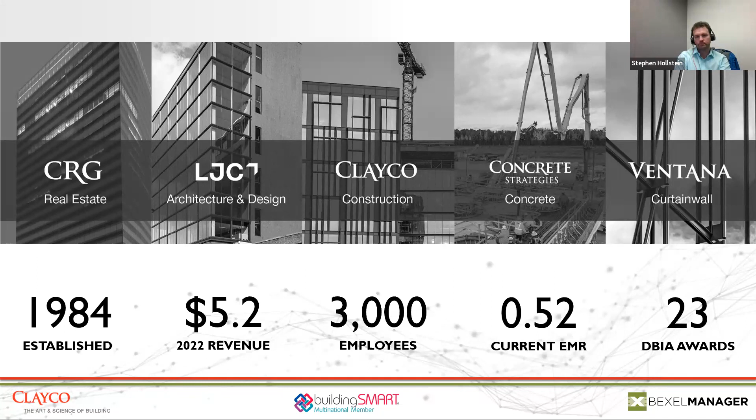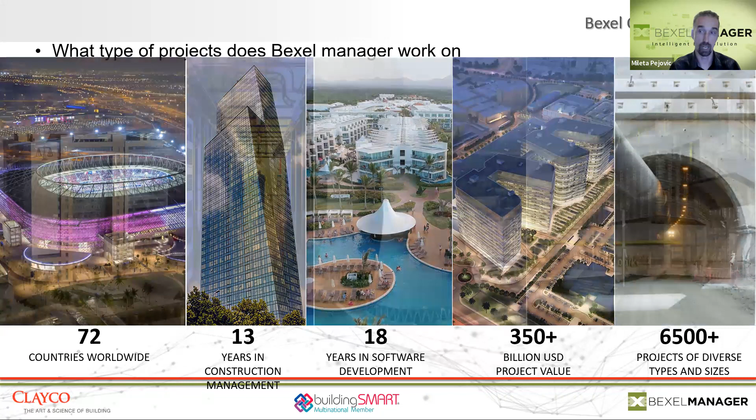So Bexel Consulting is a software development and consulting company. We are specialized for BIM in construction, and with nearly 2 decades of experience, we have become pioneers in BIM implementation, collaboration, management, and software development. Over the years, we have undertaken a diverse array of projects, varying in type and size, as you may see, and as demonstrated on this slide, our portfolio showcases our expertise and projects we have successfully delivered. In the past 9 months alone, we almost doubled the number of our clients compared to the previous year, and this reflects our dedication to driving success. Our client base includes designers, project managers, contractors, and large-scale project owners who trust our expertise and rely on our consulting services. They are using not just our services, but also our innovative BIM platform, Bexel Manager, to improve their efficiency.

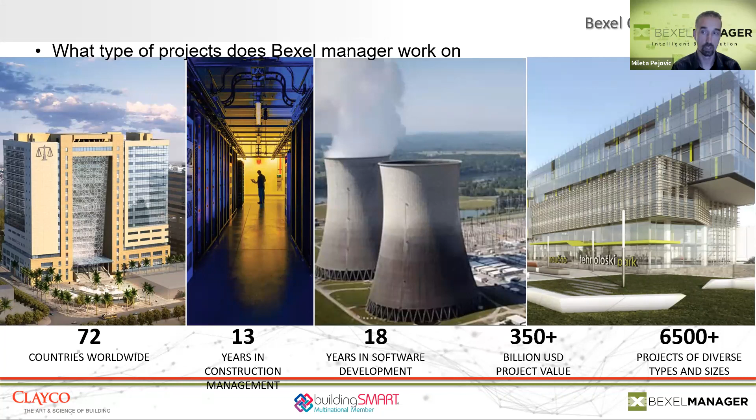So what we'll learn with this presentation, right? So our vision, there's a great motto our founder really believes in, and that's building beyond these walls. We're not delivering just a product to the customer or trying to get in budget or schedule, but really giving them the best product that their money can buy, and really handing over a product that we would want to be living in or being the facilitator of.

And when that comes, right, as Mileta mentioned as well, pioneers, right? We really are bringing in digital platforms, other technologies to really bring in and facilitate greater efficiency here. And that strategy alignment with the business model, everything from an RFP to project execution and turnover, we're really bringing that integrated delivery model. And that means data, right? 3D modeling is getting into then how do we bring in data and really enhance that and align with the data and enrich that data for our use, for managing it, for communicating it, and coordination. So the role of data in the project lifecycle, you'll learn that within the 4D and 5D environment Bexel Manager is offering here and bringing that in with Clayco.

And the partnerships, right? We don't treat Bexel as a consulting agency, they're a partner with us. And all of our projects together, we really align and really feed off one another, the benefits of one another. And from there, that is in that technology roadmap, the beta phases and bringing in new versions. They're really leaning on Clayco and other clients to offer how do we best bring better versions and enhance our abilities with various clients. And the collaboration step, I've really focused here that at Clayco with my schedule integration team, we have to collaborate. We would need to be front and center within our field teams, and we really go to the finish line together and bring that structure, proper workflows, and adopting that. And along the way, right, we are still challenged. We are every day facing challenges within their various work sectors, different projects and milestone completion dates, and we were looking at bringing success there.

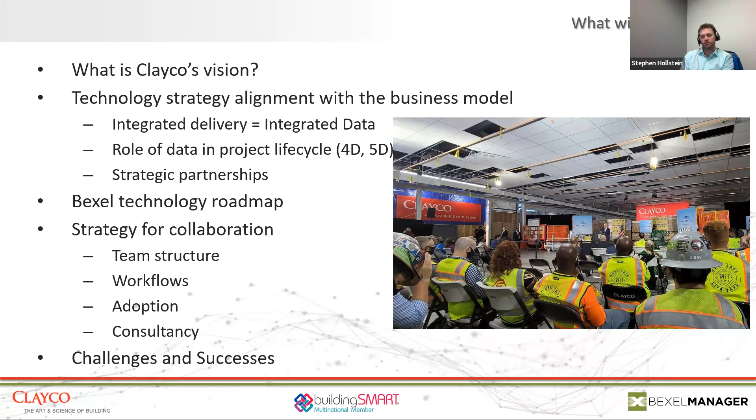Okay, so the compass is north, right? We're really looking at a strategy of always appearing and going north here, and that's in our perspective, utilizing the data that's in the 3D model environment when it comes to property information, classification of elements, and various roles within that classification of the structure within the model, and integrating that with schedules, estimates, and bringing that schedule management and cost management effectively.

And we're able to do that from the inception of a job through the build out phase of it. That really gives us perspective, going over and succeeding from previous inefficiencies we've encountered, and so much documentation and not utilizing fundamental information, working with estimators where everything is still in 2D drawing information, and being able to use the Bexel platform and provide a quantity takeoff in just 5 to 10 minutes, doing an MEP QTO I just performed.

And Mileta will share as well about going beyond pretty BIM.

From a business perspective, we have experience from both sides, from designers and from client sides. Currently we are focusing on assisting our clients in optimizing projects and project implementation and improving collaboration. It's very important to use and improve available data throughout all project stages, since the basis of BIM is 3D and the core of VDC is information. So it's crucial to use information even from the pre-construction phase to identify and mitigate risks, then during planning implement location-based planning if possible, and optimize construction processes. Finally, use collected data during the construction process for more accurate facility maintenance.

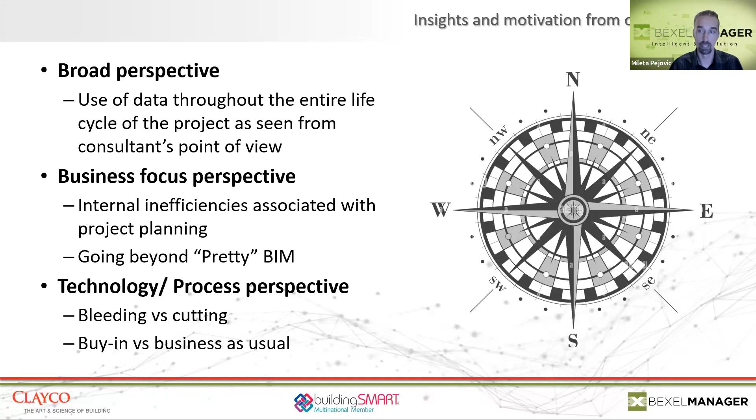Everyone plays a critical role in the success of a job. I'm a big believer that in construction projects, you win and fail as a team. We really want to bring that adoption, and get those stakeholders to really buy into the concept of wanting to succeed. We want to bring value, quality in our work, and enhancement. That's where Bexel comes in, with visualization and bringing that integration together.

My background is a lot in the project control side. I have a lot of experience working in project scheduling, earned value, cost management. This really is one of the greatest platforms I've encountered yet in my 15-year career that really hits the mark with those metrics you really need from a successful project delivery of earned value, and looking at your performance indices with schedule and cost.

And that's where the measurement comes in, right? Going through your mistakes, historical data, and really focusing on what was successful, what was not successful in past projects, the amount of effort that goes into it, and being more streamlined there. And aligning, that really goes back into the integration part of it, process and technology, the organization being vertically integrated together with all phases and all levels of the company.

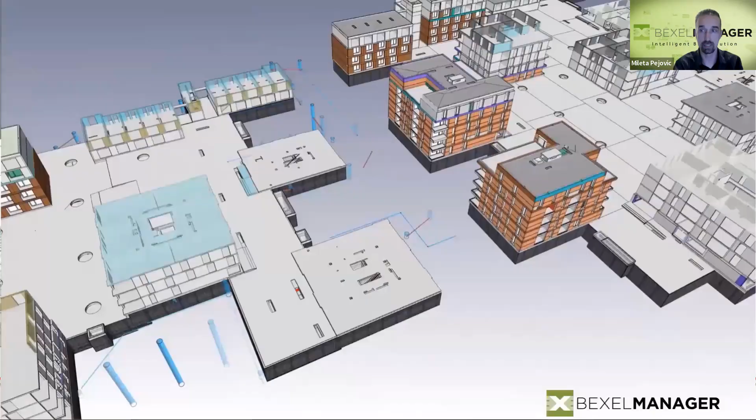This video showcases the workflows and functionalities of the Bexel Manager platform and illustrates how these features seamlessly integrate within a cloud-based reporting environment, as you may see across a range of use cases. What truly stands out is the simplicity of conducting all these BIM analyses and the freedom to exchange and share results. This significantly enhances workflows and increases efficiency and collaboration between different stakeholders.

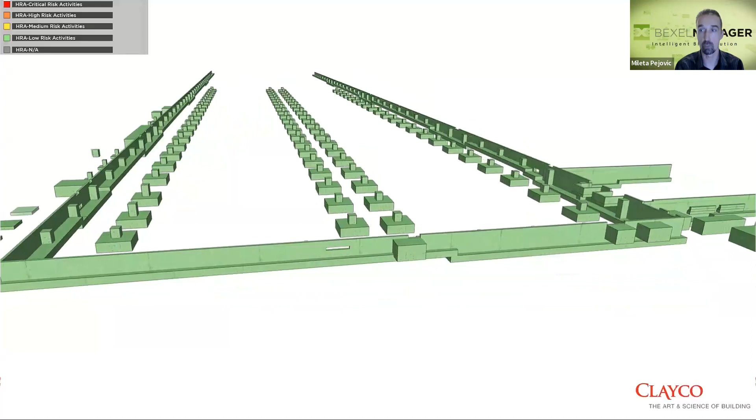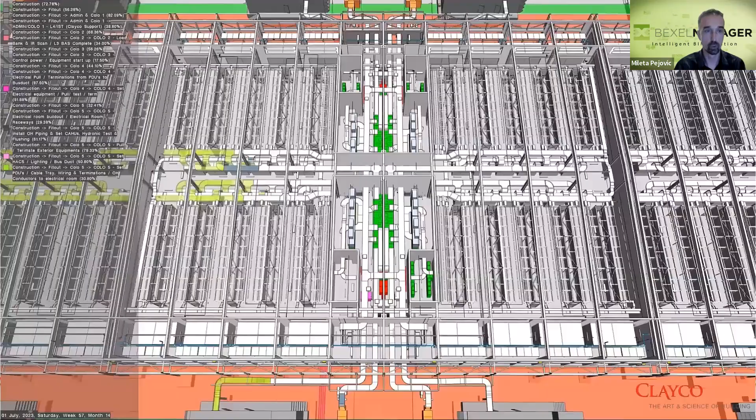These presented projects and the dashboards that I will show you in a second are typically customized to meet specific clients' requirements for real projects. These are all real projects, with challenges that came as outcomes of real challenges and real results, which are suited for our clients and finally for the investors as well.

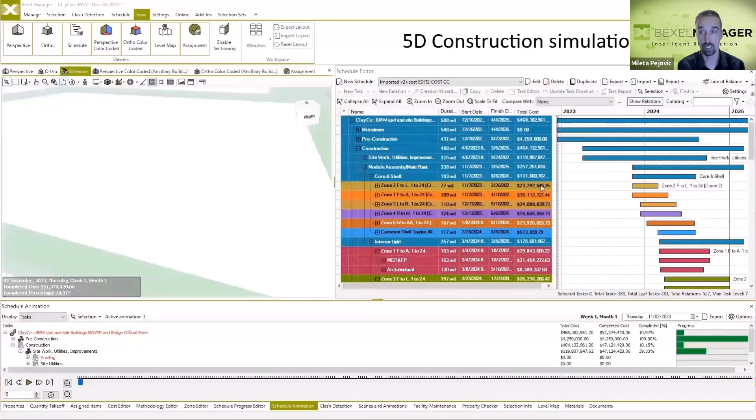I will just highlight some of the key performances, such as different types of outcomes, results, and reports that can be generated almost automatically with our tool, using different types of results.

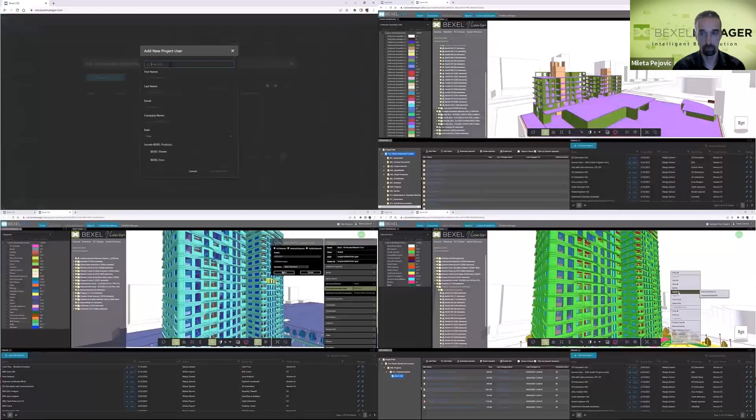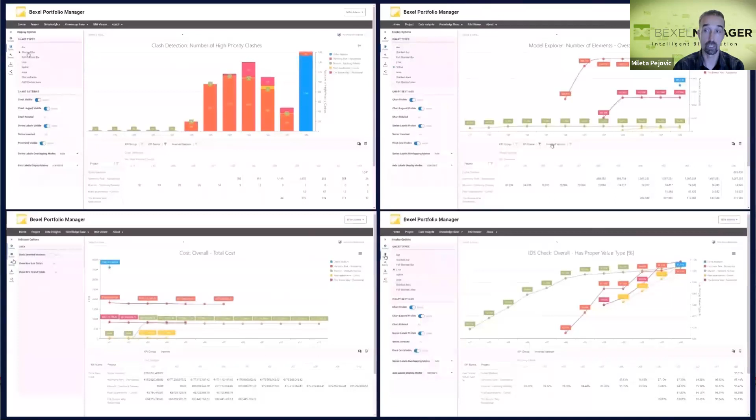Another vital aspect of project key indicators is, for example, earned value analysis, which is really important to clients and general contractors, who usually want to know this. All these results can be generated for any project at any project stage, coming from the integration of the data and geometry, and can be automatically exported directly from the platform using an automated approach.

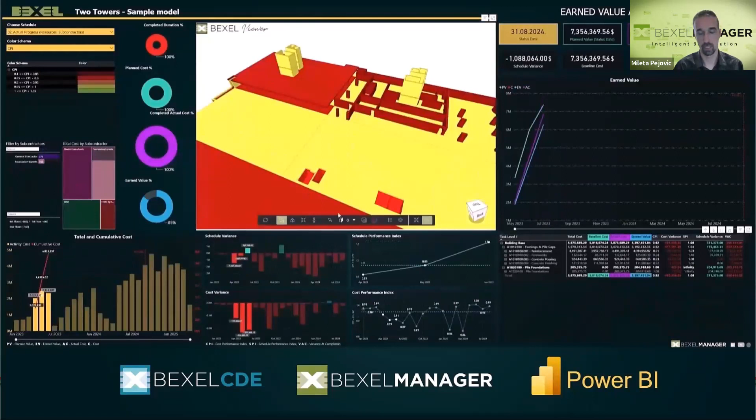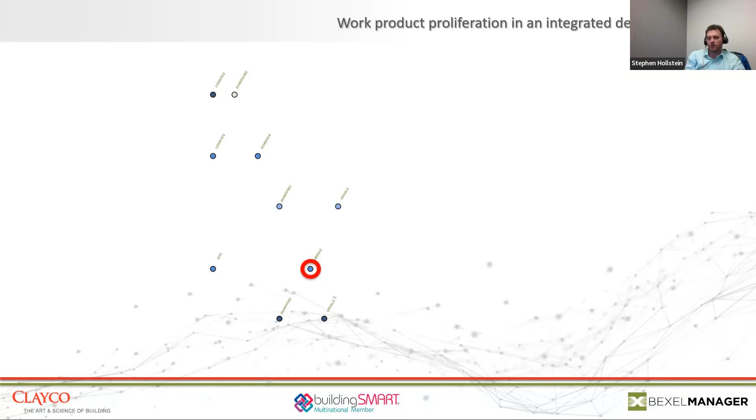One thing I'd like to add to what Mileta just shared: I think many in the group may have a perception that 4D and some of these visualizations are just a pretty picture. But what I really stress to clients, and even our construction field teams, is that we're really harnessing what the BIM model is providing us and validating our planned schedule, utilizing quantities and properties in the model.

We show how long a schedule may take, how the budget may show a cash flow, and how much money we plan to spend on a monthly basis over the duration of the project. So there's a lot more than just a picture in what we're presenting in our proposals or even in field coordination. Even on the field coordination side, there's a lot of logistics and strategy planning that goes in, from staging and material to installing in proper work zones, having a true line of balance, and leveling resources to effectively manage productivity.

So there's quite a bit there, and the pretty picture is really just missing the mark in what we're gathering. So here's a bit of a project life cycle just to display for you all within the integrated delivery cycle.

Like I showed here, I'm really hitting on schedule very early on in the early design phase, pre-con, and in through construction. And as we go into the phases of our execution, we expand. We're gathering more information. There's more maturity with model and data information, and we're really embracing that. We're harnessing that information. And what is that doing?

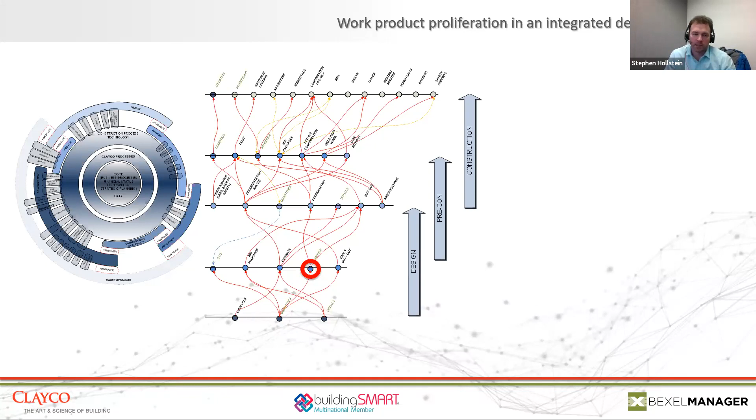Yes, so the essence of BIM is about capturing construction knowledge and leveraging it at every phase of a project, progressively adding additional layers of information and preserving it for all upcoming stages and further stakeholders that can benefit from the previously collected data. In other words, BIM serves as some kind of dynamic repository of construction insights that not only grows as the project advances, but also endures as a valuable resource for the future.

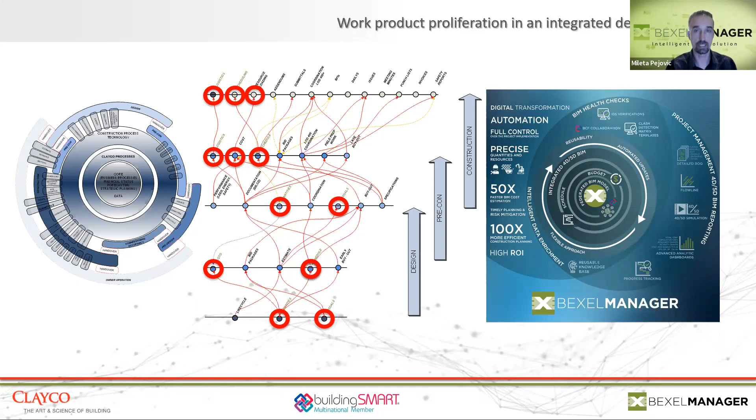And this just helps us to, let's say, collaboratively and collectively use all this wisdom of previous stages and access it. So this could be effectively applied and used and integrated for overall project success and also for the next projects, for the upcoming future projects.

So here's Clayco's multidimensional project delivery cycle, and there's one thing I really want to stress to my organization, it's maybe a funny comment to make, but you can't skip dimensions of work in order. We've been so focused on 2D dimension drawings, right? And I've heard us stepping through these dimensions of then going to 3D, 4D, 5D, and even going beyond that.

But I'm slowly trying to say, hey, we need to really manage and succeed with each of these dimensions before proceeding on, right? And let's start look at the VDC team here at Clayco and a big emphasis of their work and what they're really required to review is this BIM coordination step, very necessary step in the game.

And bringing in, again, garbage in, garbage out, right? If not good quality information exists, you're not bringing that over then into a Bexel platform to then integrate. Again, keep in mind that what we're really emphasizing anymore is this, breaking down silos.

Your information in the model is going to be reviewed and needed for other various team members, whether it be in the scheduling, whether it be superintendents in the field, estimators, even safety reviewers. So your information really needs to be communicated, and really cross interdivisions within the companies. So, and through that coordination, we're eliminating waste.

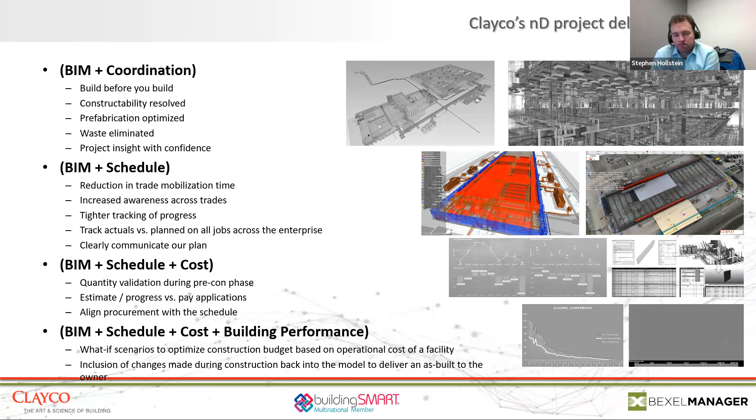So the technology journey, right? I've been out of school since 2007, and I've seen some leaps and bounds within technology. I still would admit we're sort of behind the curve when it comes to digital platforms and other technologies, but we're really stepping into the right growth there. I see a lot of young interest now, and others like-minded as myself gaining popularity within these platforms such as Bexel and others out there.

So the past has been a siloed approach, right? And I'm a believer in siloing, but you don't necessarily get the highest level of productivity out there, and you're losing communication together. Redundancy, duplicating work and wasted time, right? In the present, we're still facing these challenges. Companies slow to evolve, slow to mature, getting into these digital platforms. I hear the phrase always made, 'I've done this for 25, 30 plus years, why change now?' We need to grow as an industry, and I'm seeing success along the way here.

So from our perspective as a software development company, our goal at present is to help our clients and users integrate all workflows together. One of the important aspects of streamlining all the processes and workflows is standardization, and we can't emphasize it more. We're trying, in collaborative effort of BIM implementation, to set standards for specific work scopes and specific construction trades whenever it's possible. By doing that, we'll definitely improve and automate some processes when it's possible, but what is more important, we'll try to set a new level of transparency and information exchange.

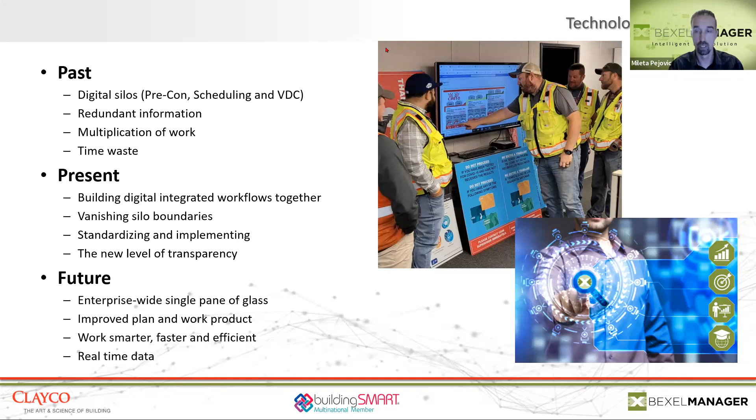Interestingly, this process of information exchange and sharing knowledge within the construction industry is something very challenging and difficult. I'm not really sure why, in contrast with, for example, the IT industry, where the significance of knowledge sharing is widely acknowledged and accepted. In the future, we envision that all information is accessible, available, and visible to everyone, anywhere and at any time.

So how do we work together as both companies, and really have a great handshake along the way, right? That's unifying our teams together. I really like that Mileta is out of Europe, I'm in the United States, but we always work flexibly as best we can to get our times right and to meet and work with other project teams.

It's always great to see other teams working with the Bexel manager platform, and Mileta and his colleagues there. We share joint meetings, work together, ask those questions, have project managers listen in and allow them to ask questions. We provide feedback on those objectives for the project, and we always set what our expectations are for the meeting and for the project.

Working on these dashboards together with Mileta has involved a lot of expectations, because we're dealing with customized dashboards based on various client requirements. So it's a lot of just listening and understanding those expectations, and then building that workflow together, building the trust.

I also came from the client side, and I really stress transparency. We're not hiding anything here. We really want to share that knowledge and the info with our clients, because at the end of the job we want to share that knowledge and information with them, and rather just be open and honest right from the start. It really forms that bonded relationship together.

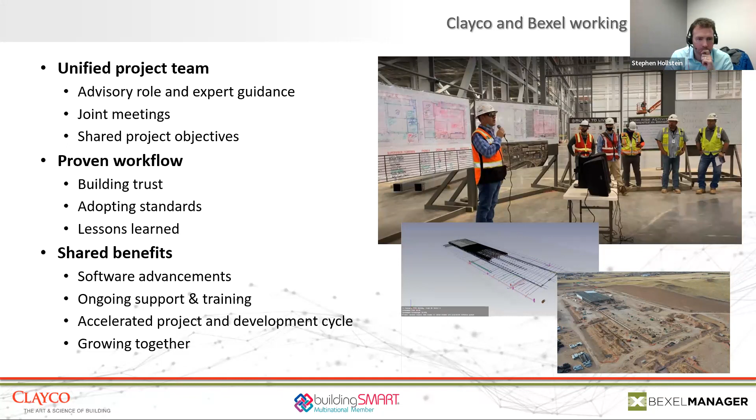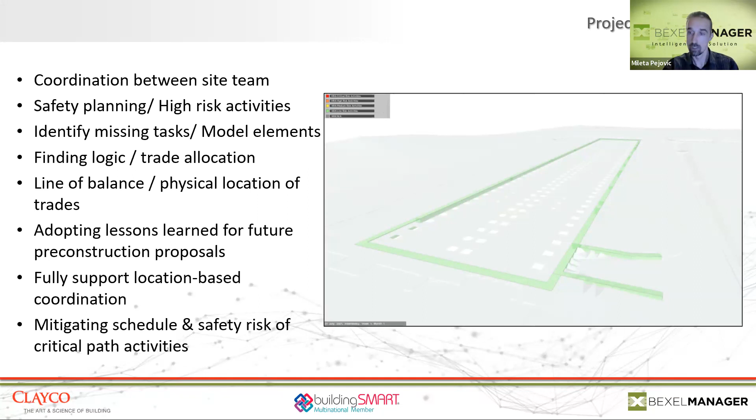I'll start with an example - a real project, very interesting and innovative data center project located in Cheyenne. This was the first project where we and Clayco worked together, and as always, new beginnings are challenging, but we still provided support to our partner to produce requested outcomes on time. Even though we didn't implement BIM fully or use all its possibilities, we still managed to evaluate the available construction plan and optimize it further. So I'll try to play the video now.

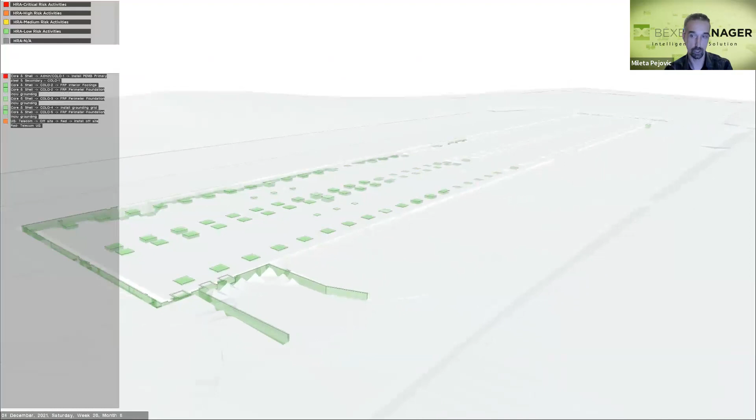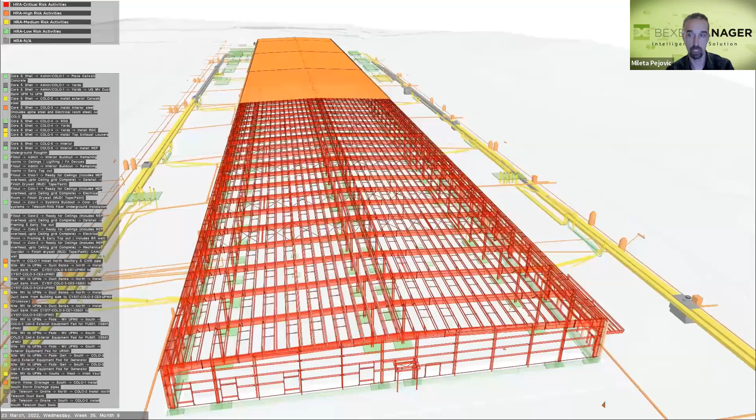Later on I'll show you the second part of the video, which shows the normal construction simulation, not colored by risk but colored by different activities.

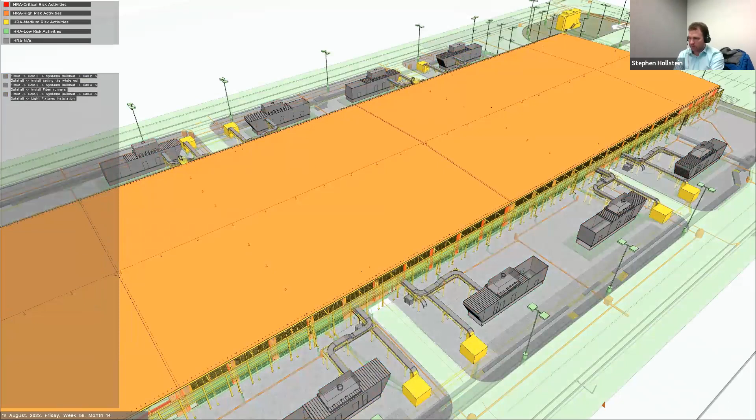This really brought up a new concept for our safety team, because it allowed our subcontractors to establish which activities posed safety risks when looking at look-ahead planning, and then to properly mitigate - whether by reinforcing safety measures, enhancing those measures in the field, double-checking, verifying job hazard analyses, and so on. Great working ability there.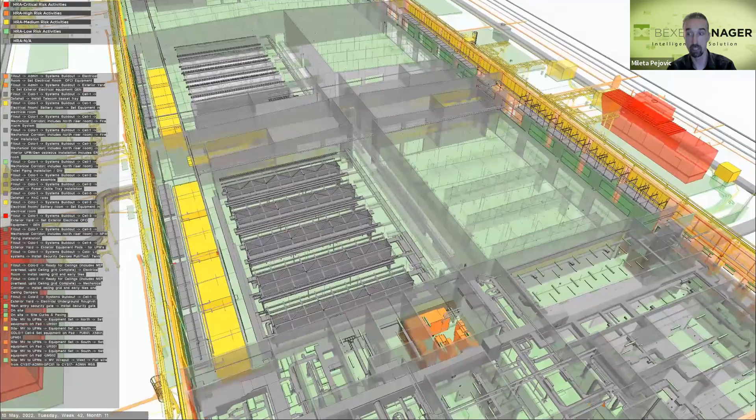In this part of the video, we're focusing on fit-out activities. This video was frequently updated and played during weekly meetings to help subcontractors focus on different areas, and also as additional help for managing resources for upcoming tasks.

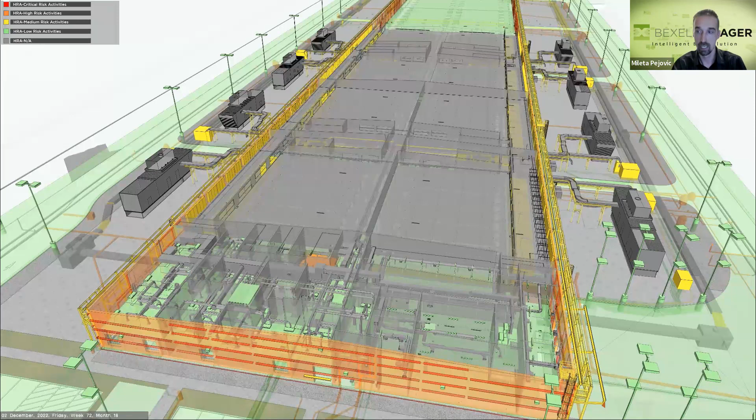During our work creating and updating this construction simulation, we identified a lot of missing activities in the schedule, because the initial schedule was created in P6, and it was relatively easy to do just by comparing anticipated tasks from P6 with available 3D model elements. We noticed a significant number of model elements not linked to any task. If you understand that each element represents some asset or activity, you can imagine how important this information could be, especially in early or pre-construction stages.

Another important aspect related to 4D simulation is enabling line of balance, which our platform does natively, so we could identify if multiple activities are overlapping in the same areas at the same time. By pointing out these inconsistencies, we're not just helping planners adjust and improve the schedule, but also saving time and money for issues that could happen on site if identified later.

Beside this, Clayco also created a lesson learned. I believe Stephen could explain a bit more on that, so they already know what to expect on similar projects in the future.

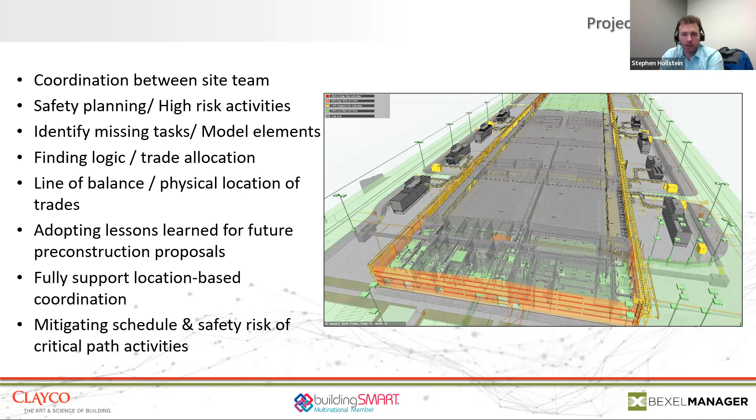Thank you, Mileta. Yes, we gather lessons learned on these projects, and I really want to emphasize that when we go into Bexel Manager's environment, we're actually making designers and planners better at their jobs. They're able to see information that, when putting together a schedule or even a design model, may not necessarily be available - you may be going off an old schedule or model that has added or removed scope. There's a level of critiquing that Mileta and I do when assessing these projects, but it comes from the cost and schedule savings we're really observing with implementing Bexel Manager.

Here is one of my first projects working with Mileta and team - a high-rise in downtown Phoenix. This was a unique request from the subcontractors: for all new subcontractors coming onto the job, they wanted to see a by-level animation of a typical build-out, everything from civil and structural works to MEP and FP works, showing the workflow - which column line an electrician versus an overhead guy was working on in the ceiling. It really demonstrated the unique capabilities of staging those plans, staging material effectively, and quality and safety during the installation process.

Again, all served by quality in the model, quality in the project schedule. And as Mileta said, lessons learned keeps coming up with each job, and we're really tracking unidentified scope, elements that are spanning multiple building levels that we don't necessarily construct multiple levels at a time, when making pours or installations, other than maybe plumbing risers or duct risers. We're identifying that missing scope, allowing our field teams to capture it, get ahead of the RFI process, get ahead of change orders, bringing better value to the client. That's really what this is about.

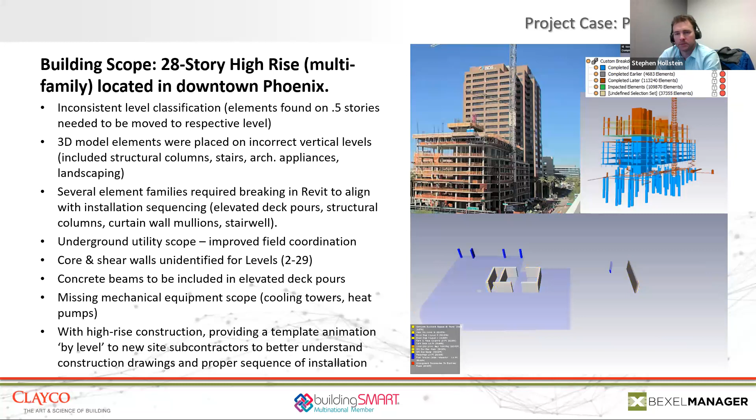But this was a great step that we did. We also did a delay analysis, showing here's what was planned to be installed by this date, here's what was executed on time, here's elements that are delayed that we need to make up. We could then also color in critical path activities that need to get done or were impacting our end date of the overall job. So multiple applications there that we used for that job.

So challenges, right? I don't want to say we're all there yet across the board. I think there's a vision at Clayco to have 80 to 90% of our projects utilizing the Bexel Manager platform, but we know that's not always the case, especially with quite intense accelerated timelines we're on. The old phrase, old habits die hard - we're all aware of that phrase. It's true, I think I'll see that the rest of my career in the industry. We're tackling it day by day, and slowly getting those champions and wins with our evidence-based case studies on these projects.

The resource allocation and budgeting - the line of balance is a really unique application, utilizing the models and which work zones they're in, and looking at density studies. I often hear clients say, 'Give me resource curves.' Well, on top of that, why don't you look at density studies and look at your overall resources, plan those out to verify your head counts, but also being productive, right? Not just looking at where's my peak manpower, but at that time of the job, can we handle that amount of people for the square building footprint?

Lack of integration - we're still there. Classification standards and standardizing, looking at our BIM execution plans - we're slowly but steadily getting there. Earned value management setup: I took a look at a project with Mileta where on the estimate side, we were not there from an earned value standpoint, truly breaking up quantities, man hours by CSI master format. We were not there. We as a company really need to get there, and get into the earned value side. Many clients in the industrial sector are requiring this, unlike so much on the commercial side.

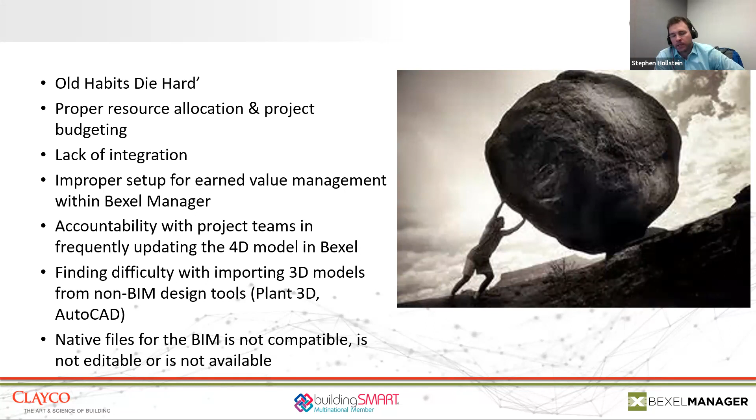Okay, now I would like to, as an example of many common challenges the construction industry is facing, explain the planning process. Traditional planning methods very often lack standardization of, for example, schedule WBS structure, which can lead to confusion or inefficiencies. BIM allows us creation of standardized and consistent WBS structures, ensuring that tasks and components are categorized and organized uniformly across the project. This simplifies schedule integration and facilitates cross-project analysis. Also, another aspect is, for example, lack of standardized naming.

Traditional planning often relies on arbitrary naming conventions, making it difficult to relate activities to specific zones, phases, or cost categories. Also, when multiple planners do the same thing or different things on the same schedule, we end up with misinterpretation or inconsistencies in planning documents.

For example, a simple thing like the name of a building or story can be used in many ways. Somewhere it could be named as a level, somewhere in a schedule it could be called story, and sometimes level is just an abbreviation like L01, L02, or sometimes L1, L2.

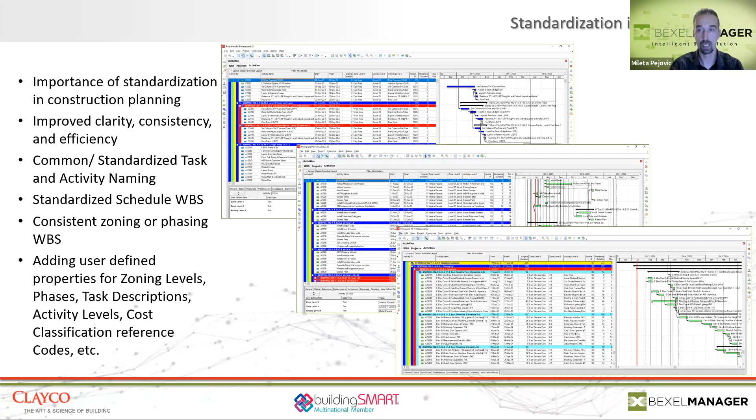So during construction and the tracking progress process, it becomes even more challenging to control activities and budget, and also assign resources to respective activities. These are just some of the common challenges when we talk about the planning process.

We also understand that achieving comprehensive BIM implementation across all project departments could be a very complex, gradual, and slow process.

The transition phase of BIM implementation is very challenging, and engineers involved in the process usually strive to leverage available BIM data while at the same time trying to use traditional workflows. This could be caused by tight project deadlines or the need to develop proficiency with new software or tools.

But in any case, we're trying to optimize and simplify these transition processes and facilitate a smoother integration of BIM practices. In the later stages of this example, I will explain how this process could be adopted, and how transition between traditional and BIM-based planning could be utilized following a few steps.

First, for example, planners in P6 could put in a small amount of extra effort to create custom user-defined properties that could later be used for automation of linking the schedule and 3D model elements. This could include adding additional textual properties such as zone levels 1 and 2, representing different zones or areas of activities, and also properties defining activity hierarchy level, which can be used to link a specific task or activity with respective cost items.

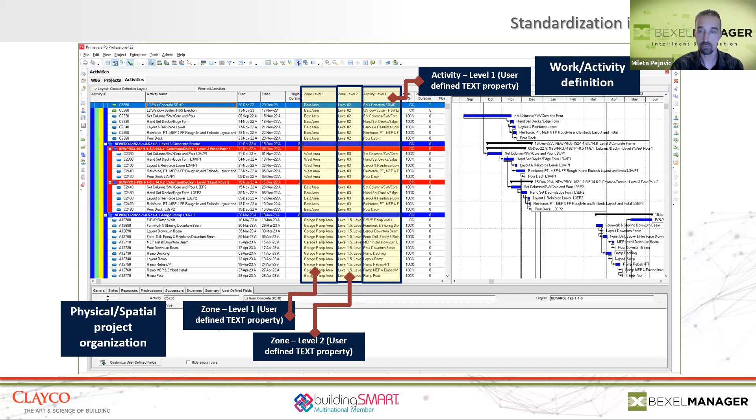So this is how the process works in reality: in an example where planners still utilizing a traditional approach through P6 add additional codes based on CSI or MasterFormat. Respective tasks are enriched with these custom properties, and if they use a common or standardized naming convention for at least buildings, levels, or areas, then most of this information can be used to auto-link that P6 schedule with model elements and generate a 4D construction simulation.

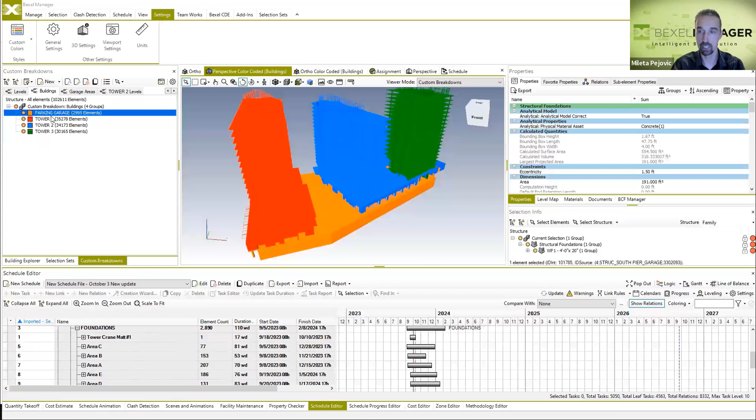So I will try to show you on a video. Using our platform, 3D models are systematically structured based on buildings, levels, and areas using common IFC properties. These are always coming into the platform from available information from the authoring tool.

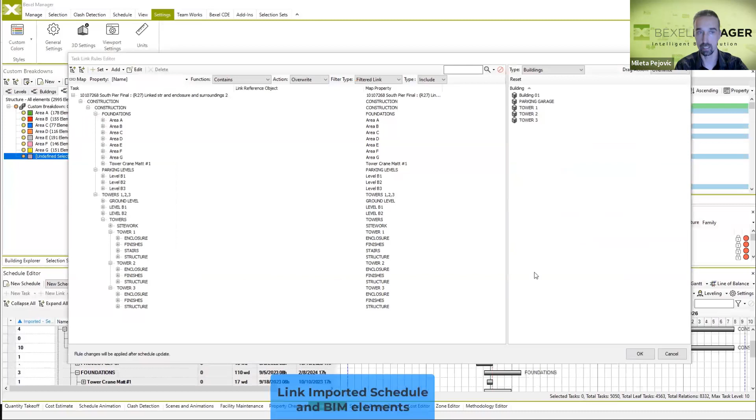In the video, we can see imported tasks in the schedule on the left side of this window, and on the right side we can see 3D model elements and connect these elements with tasks.

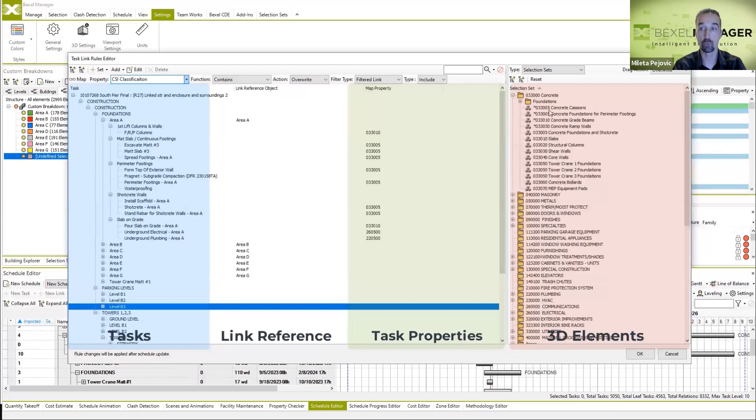Initially, the connection is done automatically using common model groups such as buildings, levels, or areas, but our system also uses element connections with hierarchy levels and filters these hierarchy levels through lower hierarchy levels of the schedule, making it possible to create as few model element groups as possible, while they can still be accurately connected and presented in the construction simulation.

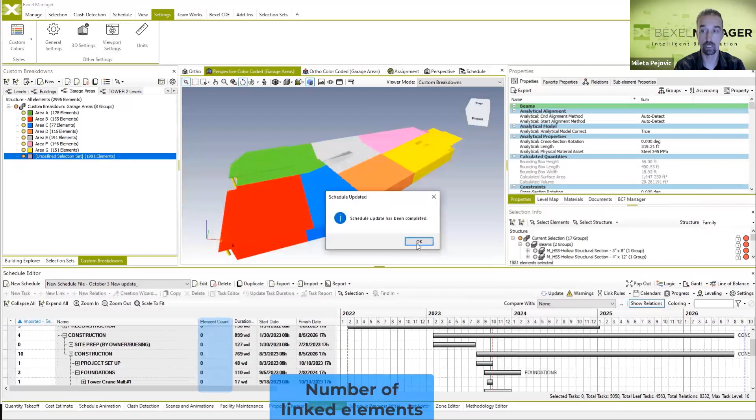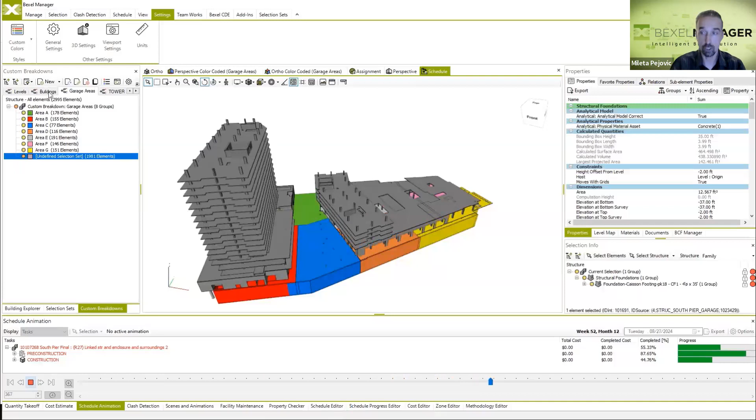And finally, on the lowest tasks of activities, we're linking task model elements with groups of elements from the 3D model, organized according to an adopted classification system. In this case, it was CSI MasterFormat. This was just a short example to understand how quickly, in a specific situation, we can generate a construction simulation—in this case just for structural works—when everything is set up properly, with additional effort from the traditional approach in P6 combined with automation from our platform.

And the great ability here, team, just to let you all be aware, is that schedules continue to get updated, and models can be updated as well at different stages. The idea behind the mapping, the way Mileta is sharing, is that if those IDs remain the same and untouched, names and other information can be revised and so forth.

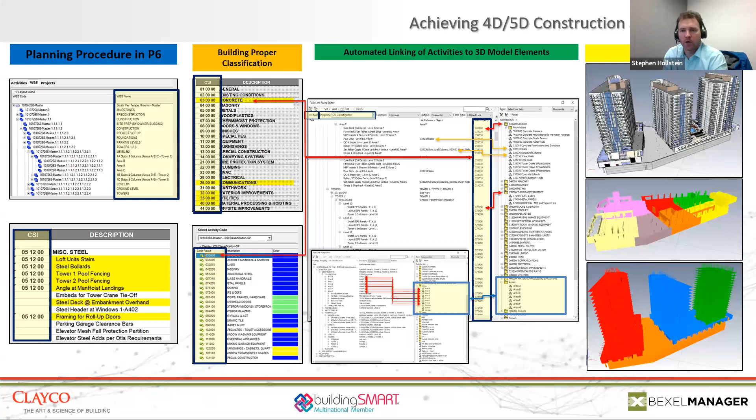But if the mapping isn't touched like this, every time an update comes in you'll be able to produce an animation very quickly without having to make any changes or risk anything being missed. We've encountered in our experience that when going by name mapping, or information that can be changed, the Bexel platform may not recognize that based on a new schedule or model import. So it's important that we're classifying on IDs or information that we know remains unchanged throughout the project life.

Exactly. And these are some of the outcomes or results of the BIM-based scheduling process, or in this case, the process of linking the 3D model and the imported schedule. So we have many advantages for projects with repetitive or linear processes. Some of the benefits include visual representation of these activities in the form of a line of balance, showing where and when these activities will be executed, as well as the ability to easily optimize efficiency in such scenarios.

With the ability to see the work distribution over time, project managers can easily allocate resources and effectively ensure that labor, equipment, and materials are optimally used. Also, progress monitoring becomes more precise and much easier using this line of balance, and VDC managers can identify discrepancies between planned and actual work. Finally, engineers, architects, contractors, and subcontractors can work together more efficiently by using this visualization and project timeline to design and share their information in a digital environment.

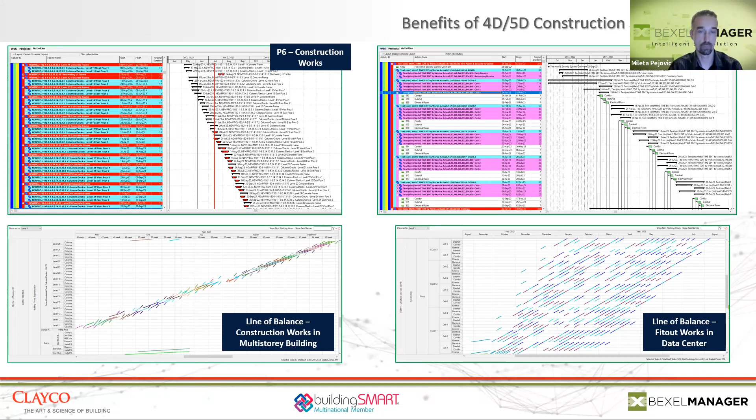Just to add real quick on some of these reports that Mileta is sharing—there's a lot of enhancement that the line of balance is offering. With these reports, we can give monthly evidence of cost information based on its allocation to schedule activities. We can break it down by different trades and different resources for histogram curve information.

And again, ultimately, we can get progress information. We can feed that into Bexel Manager and print out a progress report. Here's the actual evidence of earned information based on model quantities of what's being installed, and verify that against what was paid out or what is planned to pay, accruing based on what we forecasted in the budget.

Exactly, and these are just some of the benefits you can achieve with this integrated approach, using partially a traditional way and partially automation from the system. Imagine how these results could be achieved, and how much faster, if everything was standardized from the beginning and based on BIM entirely.

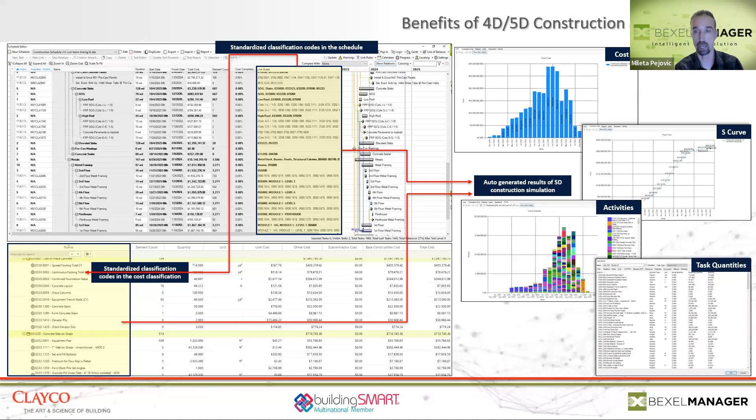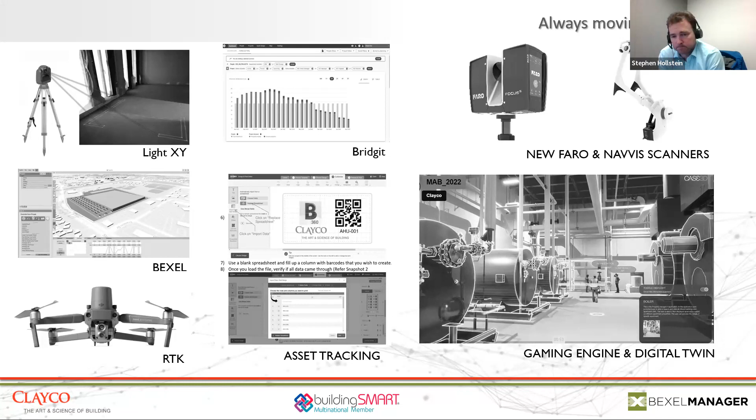So real quickly, where are we headed? Standardization is a big piece of this within my team right now, bringing together this schedule integration, and it's bringing speed to market. It's optimizing schedules, enhancing our ability to provide project turnarounds for clients that need production at a certain contractual milestone date. We're versatile, meeting those needs of tomorrow, able to be flexible and utilize digital utilization with this, and the gamification that goes with it. This is very cool stuff in the world right now that BIM and schedules are really being offered to, so we need to embrace this.

Definitely, as Stephen mentioned, we need to make a site team also comfortable with the model. And also, we know what COVID did to all of us, to the construction industry, and how we managed to successfully transfer from on-site to the offices and transfer the collaboration process to online and remote collaboration using different cloud-based environments.

So we can create, for advanced simulation, more than just simple 4D, and include all available data domains and information generated in pre-construction phases, but also add additional layers of information during construction progress. We also have the possibility to analyze various aspects of projects: cost, quantities, resources, specific asset information, for example pressure or flow for mechanical pipes, or evaluate fire rating or specific areas to analyze, for example crowd simulation, all from the same source of information.

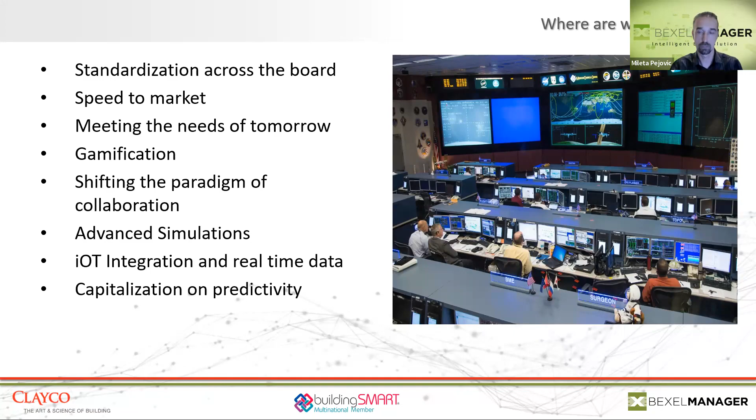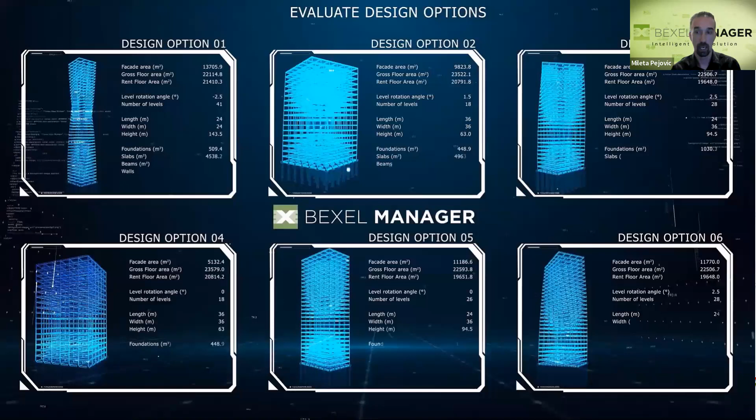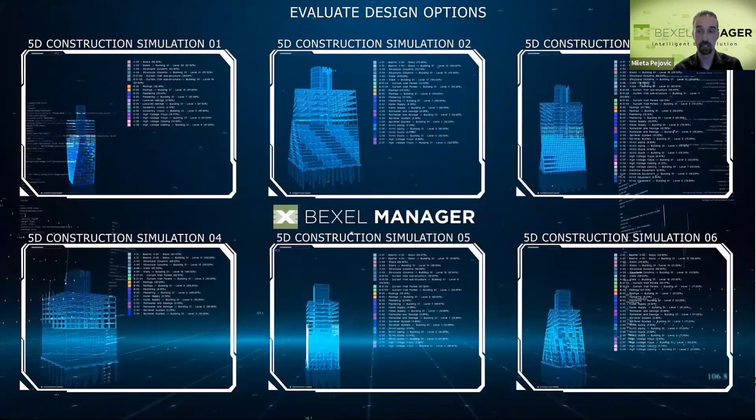So from the standpoint of a software development company, we're aligning ourselves with technological advancements. We're exploring possibilities of incorporating AI to evaluate design, to evaluate the schedule process more efficiently, and through the implementation and standardization of things, we are trying to automate processes such as model data enrichment and cost estimation, to achieve higher levels of accuracy and to be more efficient.

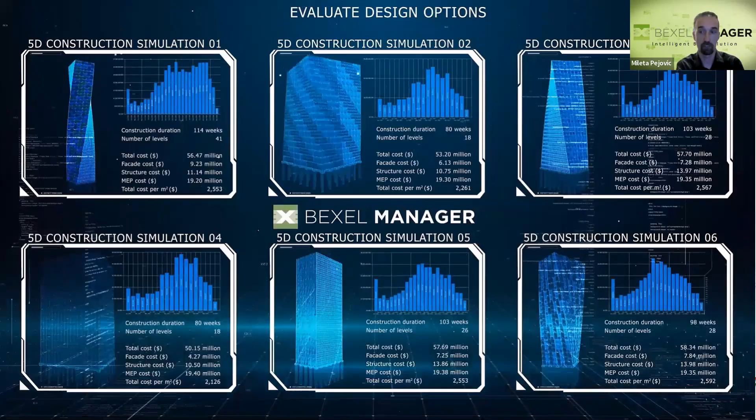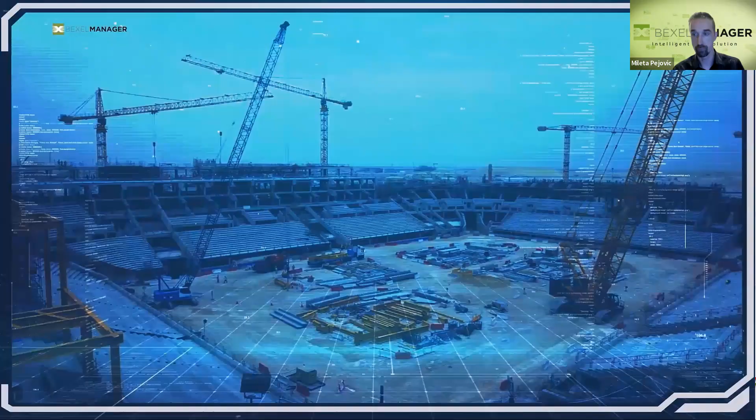Our future endeavors are aimed at seamless integration with different data sources, regardless of where these sources are - Internet of Things or extensive cloud data repositories. Everything is, in a way, approachable and tangible to us. And the ultimate goal is to provide project managers and owners with a comprehensive, interactive experience, making them feel like commanders in a command center of the future.

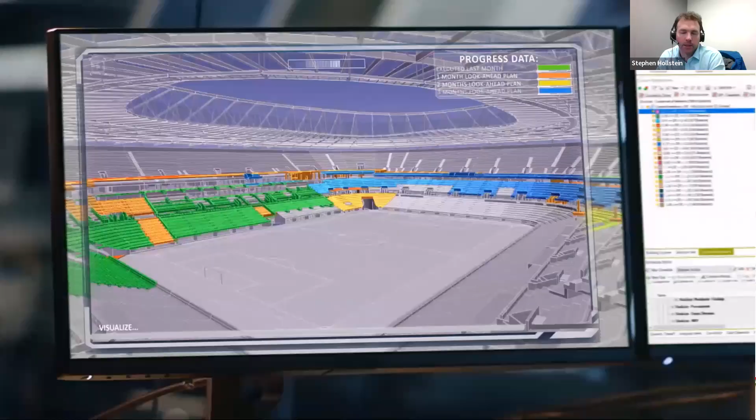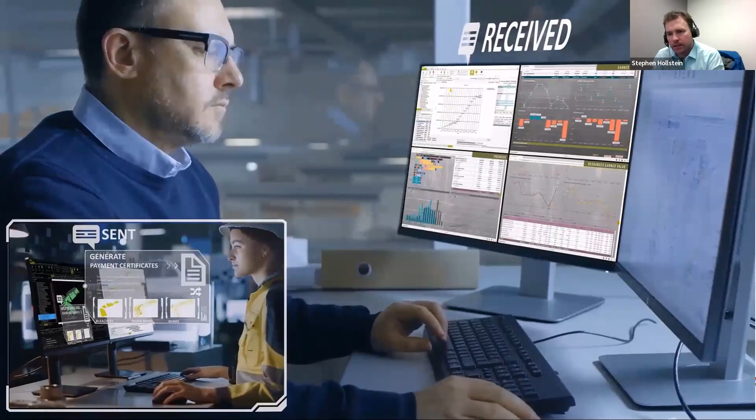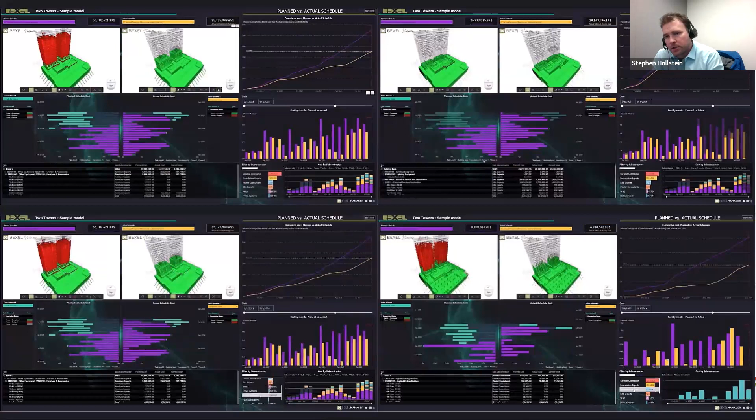And just to close on my side as well, we've really successfully brought in Bexel Manager here for our projects and utilized this. We offer this to clients, and it's been very well received. They've really liked seeing the data it collects, the information we can coordinate and manage, and even subcontractors and the field side are really gaining traction right now in utilizing reports and animations. It speaks to a lot - it better communicates our overall project and facilities. Going into 2023, I see a bright future here using Bexel Manager within Clayco, and also bringing this into our company, for key executives and leaders to really start seeing a mindset in how we track data and manage utilizing BIM in the best approach.

So thanks for everyone who can listen in.